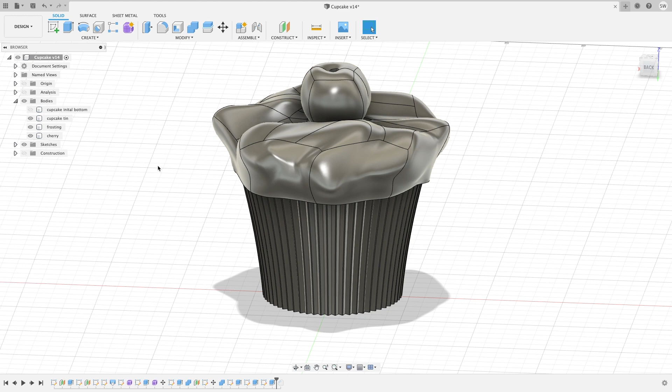All of these were 3D modeled with a slightly different technique to achieve the organic shapes in them, and that's something new for me. I haven't done a lot of organic sculpting in 3D modeling. So this was a fun way for me to practice that and learn some new techniques and try some new things out.

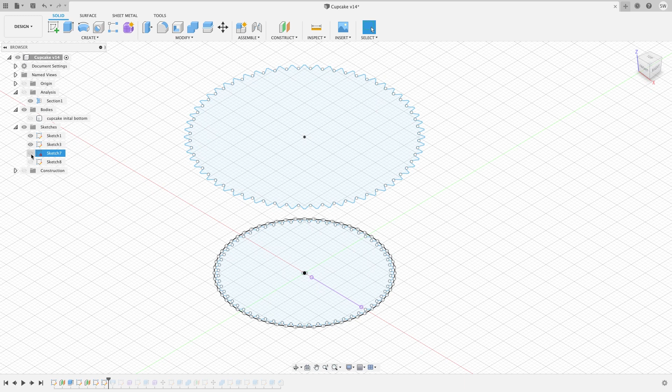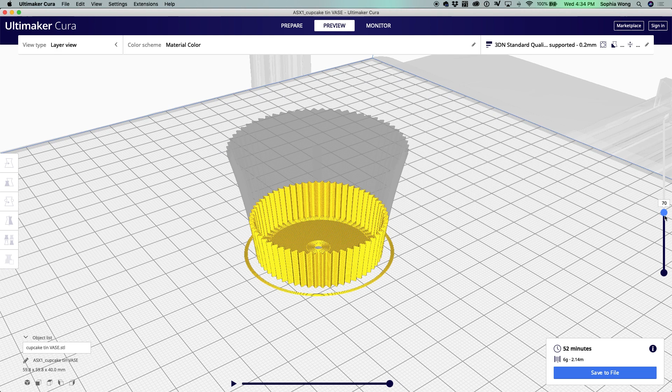The cupcake tin was pretty straightforward to model. I made a zigzaggy circle for the bottom sketch profile, then duplicated that profile twice, a little bit higher up, and made them a little bigger so I could make a loft to create that gradually widening shape of a cupcake liner. I left the shape solid here because I decided to print this part in vase mode, which saves both material and time. Once I had the liner sorted, I needed to make the frosting, and for this I jumped into the sculpt environment in Fusion 360.

I haven't worked much with this mode before, but a while back I followed a great sculpting tutorial by Devin at Make Anything, which I'll link to down in the description. He explains the basics really well, so definitely check out that video and all of his awesome tutorials.

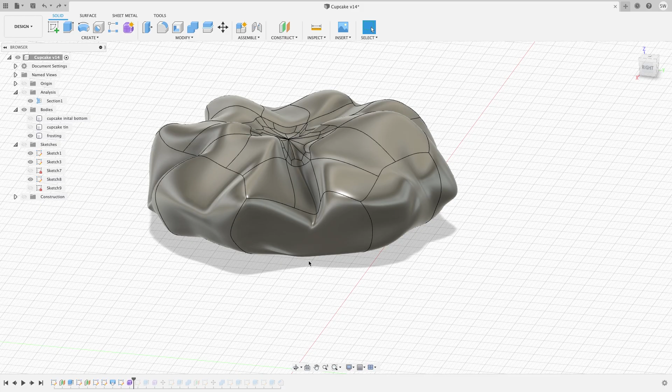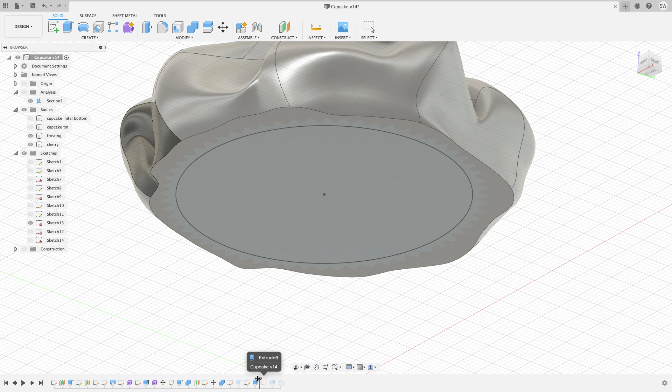I started with a primitive cylindrical shape, and I just smooshed it around for a few hours until I had something that kind of looked like frosting. Then I flattened the bottom with an extrude cut to make it printable. To make the pieces interlock, I used the top profile of the cupcake liner to do an extrude cut in the bottom of the frosting. Then I just enlarged that a hair for some wiggle room, because gaps tend to shrink a bit during printing.

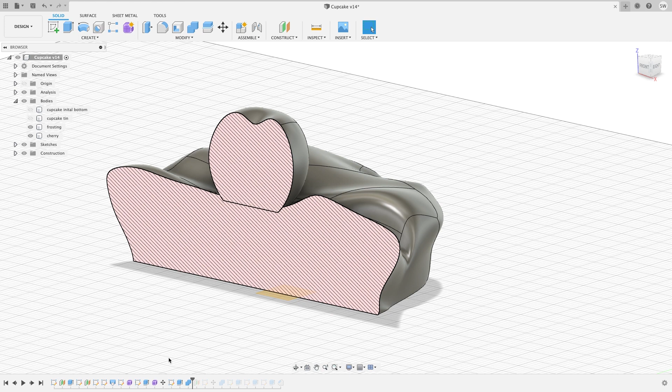I used the same sculpting process to make the cherry on top, and I nestled it down into the frosting before doing a Boolean operation to cut out a space for the cherry to sit in. With the cherry in place, I made a 2mm hole through all the pieces from top to bottom so that I could thread a piece of ribbon through to hold everything together and hang it on the tree.

I printed the liner in vase mode, and I printed the frosting and cherry with standard infill using a shorter layer height to get all those curves as smooth as possible.

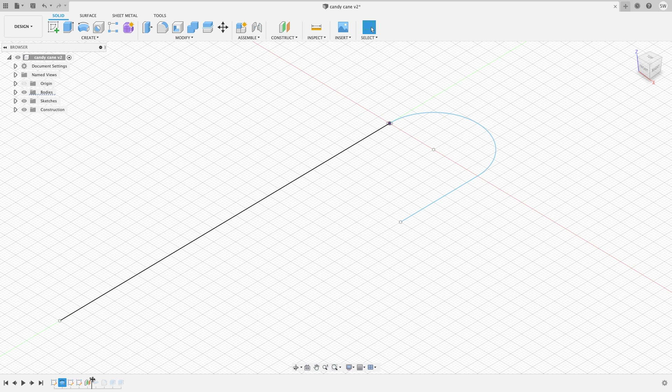These were really simple to model in Fusion 360. I started by drawing the hook shape of the candy cane as a sketch line, then I created a pipe object following that line. I rounded the edges and shaved off the bottom to make a flat surface for printing, and that was it. Candy cane shape achieved.

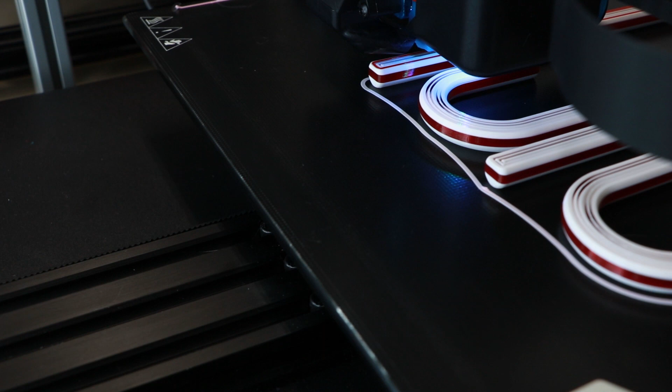But the twisting colors are really what makes this look like a candy cane, and here's how I did that. The colors are actually printed in flat layers, and I did that by manually pausing the print and changing the filament from red to white and back again just a couple of times.

It's nice to print a bunch of these at once so you can get the most out of those filament changes. It's definitely worth the effort because the twist looks much better with 3 or 4 stripes.

To get that classic candy cane twist, I dunked each candy cane in hot water for a few minutes, then twisted it by hand. I used water right off the boil from my tea kettle. It's gotta be really hot, so be careful.

I held the candy cane under the water for a bit until I could tell it had softened up. It was much more manageable to do one side at a time rather than throwing the whole candy cane in and trying to twist the whole thing at once. The plastic cools really quickly and it stays in that classic candy cane twist.

You don't need ribbon for these, you can just hang them on the branches of the tree. They just stay there and pretty much look like real candy canes. Just make sure no one tries to actually eat them.

Now, it took some experimentation to get this to work. For my first few attempts, I either had too much infill, resisting the twist, or not enough infill, resulting in this crushed straw look. Neither of these are very candy cane-like.

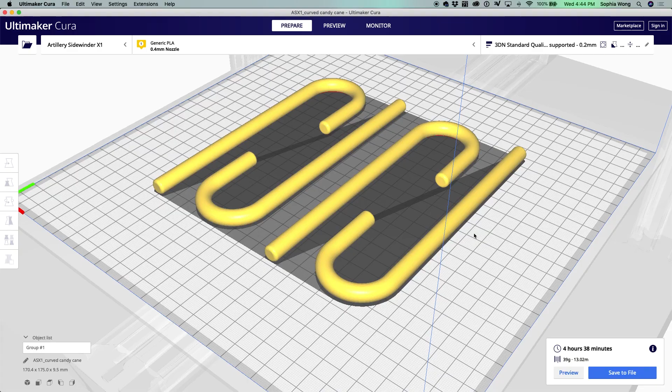I found the best option was to use the concentric infill pattern in Cura. This gives the print enough internal structure to keep it from crushing in, but it's all running down the length of the print, so it doesn't fight against me so much when I'm trying to apply the twist.

Now the ribbon candy actually started on my iPad, and this is really exciting because I've been wanting to figure out how to do more organic shapes and get more of a freehand drawing feel in my 3D printed projects. I recently found a really great tool for that. Adobe recently launched Illustrator for the iPad, and it's a great way to make hand-drawn vector shapes.

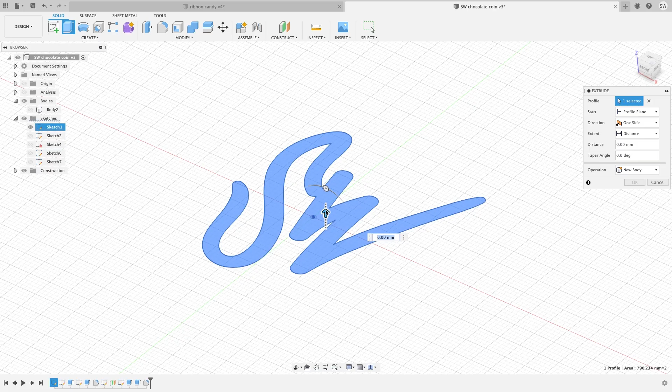I have just scratched the surface with this new app, but I've already used it to make hand-drawn text and patterns that can be extruded in Fusion 360 and 3D printed. I'll probably go into more depth about how to use this app in a future video, but let's look at how I used it to make this ribbon candy.

If you don't know what ribbon candy is, I guess I don't really know what it is either. I've never actually had the real thing or seen it in real life. I've only ever seen the ornaments, but they're always squiggly shaped like this and they have stripes, so that's what I was going for.

So again, I sketched out a little plan before I started. It's a pretty simple extruded squiggle shape, and I decided I would use the filament swap technique to change the colors during the print to create those signature stripes.

In the new Illustrator app for iPad, I used the blob brush pen to draw some squiggles that look like that sort of figure 8 shape of the candy. This was really fun to do, and this was so much easier than drawing these squiggles with the typical Bezier pen tool with a mouse.

It's doable, but honestly, to draw flowing vector shapes by hand like this is kind of a dream come true for me. I guess if you have a drawing tablet like a Wacom tablet, you could already do this in Illustrator, but I don't have one of those, so this kind of blew my mind.

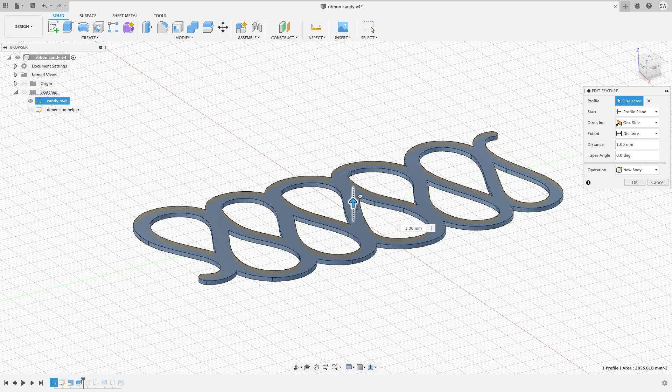On my computer, I chose the shape that I liked best and exported it as an SVG file to bring it into Fusion 360. In Fusion, I extruded it and rounded the edges just a little bit, then added a hole running down the center for a ribbon.

I used a trick here that I learned from Angus at Maker's Muse. I used a hexagonal hole instead of a circular hole, and that keeps the hole from distorting and closing in when it's printed vertically.

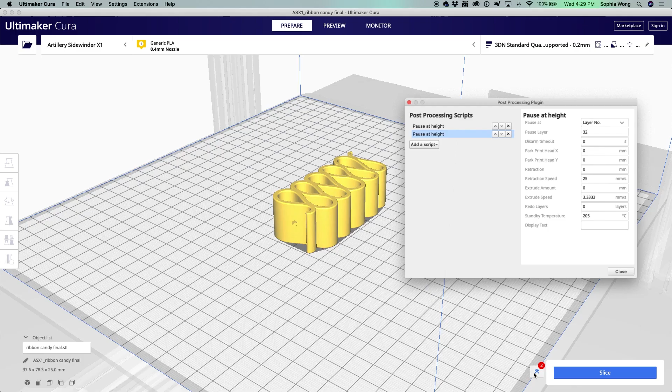I sliced the model in Cura and set up a few pauses during printing for filament changes, which gave me a bunch of stripes. It's great to print a bunch of these at once, so you're not doing 4 filament changes for just one ornament like I did.

A quick technical note here: printing these turned out to be surprisingly tricky because it turns out that all those squiggles are actually pretty G-code intensive. With no straight lines and all those curves that swing back and forth, the printer is receiving constant instructions, and if those instructions are being delivered over USB, you may run into data buffer issues like I did.

My prints were looking very crunchy and bumpy until I switched to printing off an SD card instead of printing over USB from a Raspberry Pi. I definitely recommend printing these from an SD card and printing them slowly. That gave me buttery smooth sides that really look like candy.

After printing, I threaded some ribbon through the ornament, again using that straight pin trick, and tied a knot on the bottom. Yeah, I think they look pretty good on the tree.

So it started out as kind of a silly holiday crafting project, but I ended up trying a bunch of new things and learning some new ways to make these irregular organic shapes. These candy canes were really tricky to get right, and it was way harder to 3D print this squiggly ribbon candy shape than I expected it would be.